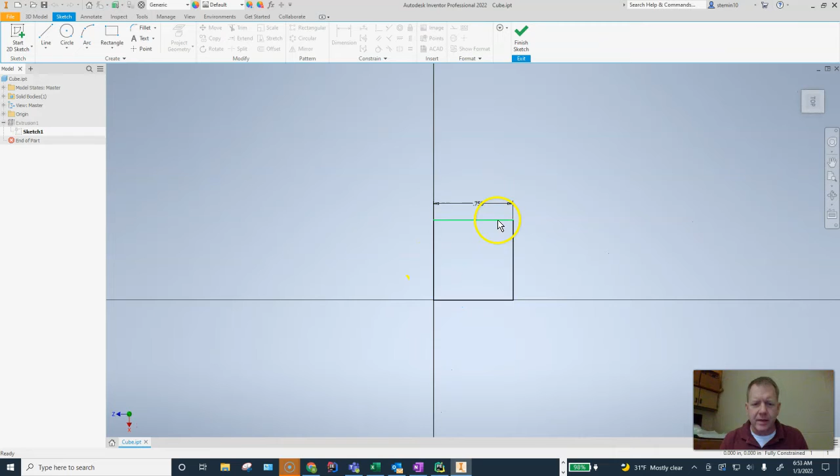So let's take a look at making a joint. I've created a new part file here in Inventor. It's a 3/4 inch cube. I can expand the extrusion I used to make the cube, right click and edit the sketch, and I can see that I made a square. Let's show some constraints.

I put an equal constraint. The equal constraint already came in because I used a rectangle for the opposite sides, but for the adjacent sides I created an equal constraint. So just one dimensional constraint gives me a fully constrained sketch, as I see down here with fully constrained. Awesome, we love geometric constraints.

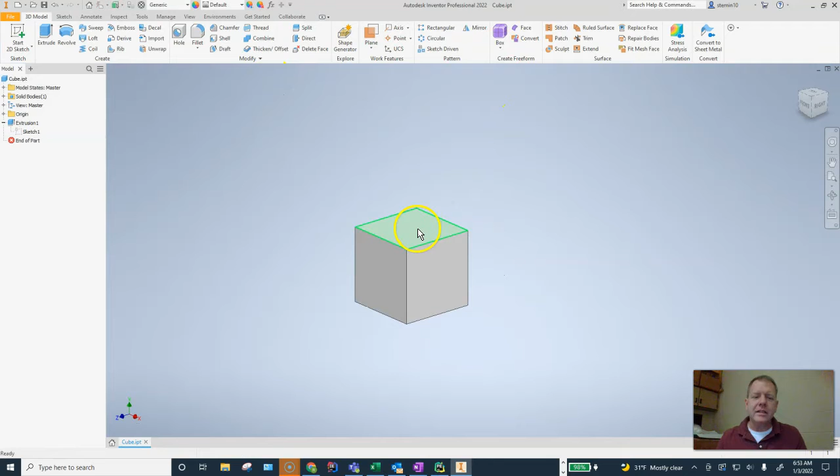However, this is a single cube. I want to put several cubes together. In fact, I want to put 3 cubes together, and I'm going to do that like this. I'm going to go up to the File tab here in Inventor, hover over New, and choose a new assembly.

I have saved this part file. The part file must be saved to be able to make an assembly using the part. So I come up here to Assembly. It's a new type of file, no longer an IPT file. It is a file I'll save as an IAM file - Inventor Assembly file, no idea why, but IAM is the extension. That's how you'll differentiate between a part file and an assembly file.

I am going to save it as cubes.iam. Now the first thing we have to do is bring in the parts that we want to create an assembly of.

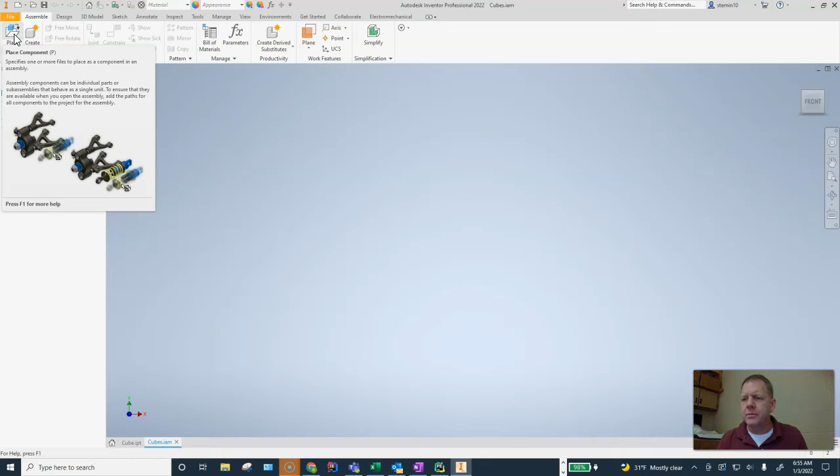So I'm going to come up here to Place, and if we hover over that, it tells us to specify one or more files to place as a component in an assembly. I can actually bring another assembly into this assembly, but that's pretty complicated, so let's stick with parts at this point. I am going to place a component. It brings up a file browser for me to look for my parts. I want to use my cube.ipt part. I'm going to click Open.

And it's going to allow me to now start placing parts. I'm going to zoom out a little bit and place a cube by left clicking. That's my first one, second one, third one, and what the heck, let's put in a fourth. Let's get a little crazy today. So I have 4 cubes in my assembly now.

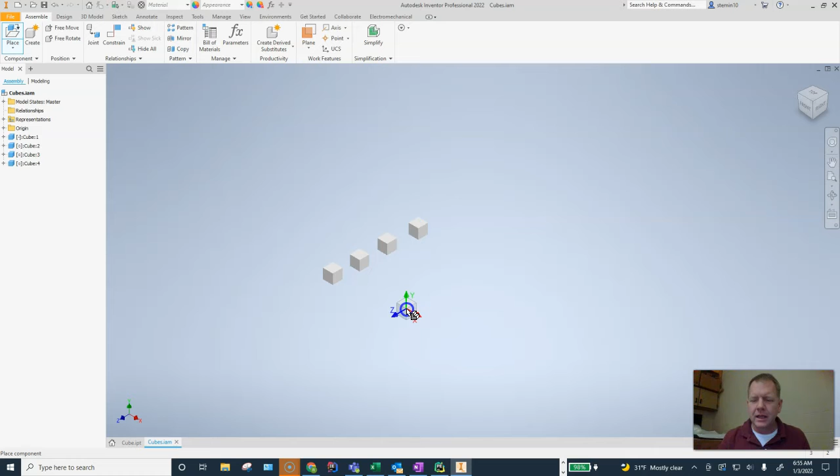The first thing I need to do is pick one of these cubes to be the anchor, because right now I am left clicking and dragging and I can move all of these cubes. None of them have any kind of fixed position in space. Well, I need one of them to become my grounded or anchor part. So I'm going to right click on this guy here, and I am going to choose grounded from the context menu that pops up.

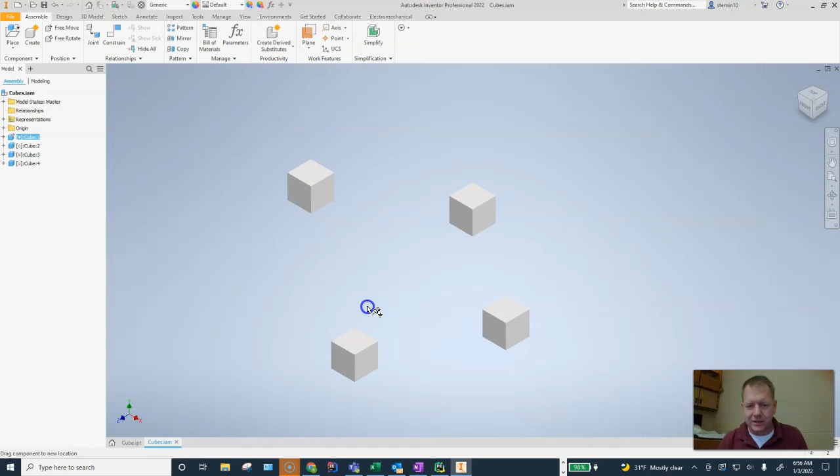When I hover over that, you can see my little mouse icon is different than this one. It has a little grounded icon symbol that shows up. And if I left click and drag, it doesn't go anywhere. It's now grounded. That's my anchor. And that's what we want. We always want one part to be our anchor.

The other parts now will come and join with that anchor. And because they become joined to the anchor, if we make rigid joints, meaning they can't move at all, they'll all be grounded essentially because they're glued to a fixed part to start. So that's the point of grounding a part. We'll unground it later and I'll show you exactly what that means.

But let's come up here now and create a joint. You can hover over the joint tool and it'll pop up and show you a little bit of help. A joint fully defines the range of motion, placement, and behavior of a component. These relationships that we're going to apply will tell the part where to go relative to another part. So these are all going to kind of be like a whisper down the lane of joints.

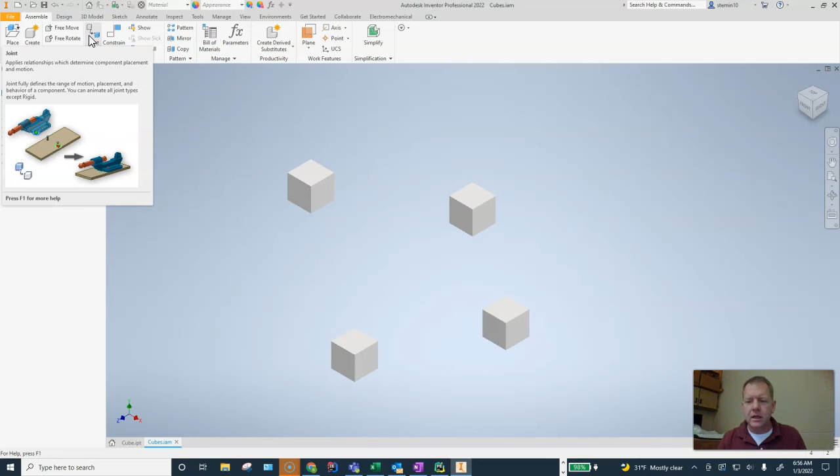The first part's grounded, the rest all come together to join that. So let's make a joint. Click on the joint tool, it comes up. I generally allow automatic to be the joint type that it creates to start. A gap would allow us to set an offset so that if we want them to be joined and locked in place but not stuck right next to each other, we can do that. And then our connections and alignments over here will define exactly how the joint plays out.

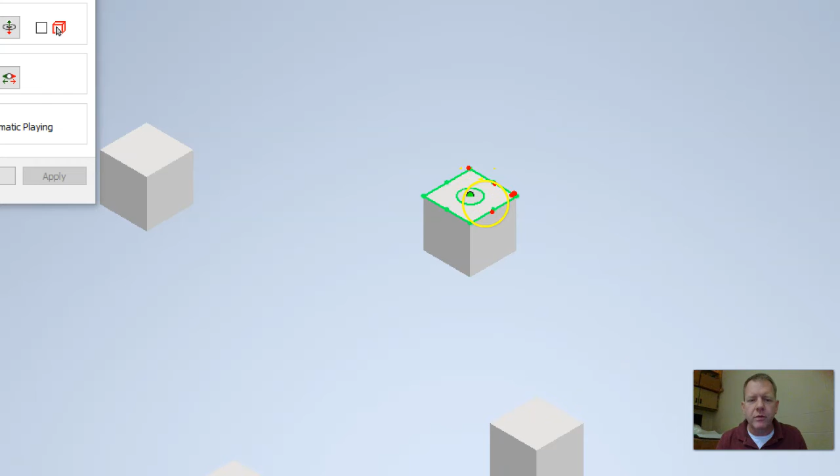So the first thing I'm going to do is pick. Down here it says place origin on first component. Well, the first component origin is what's going to move. So this is the part that's moving to join to the second part. I'm going to pick on this face, and you can see all these little green dots tell us the reference points that we're allowed to use for our alignment.

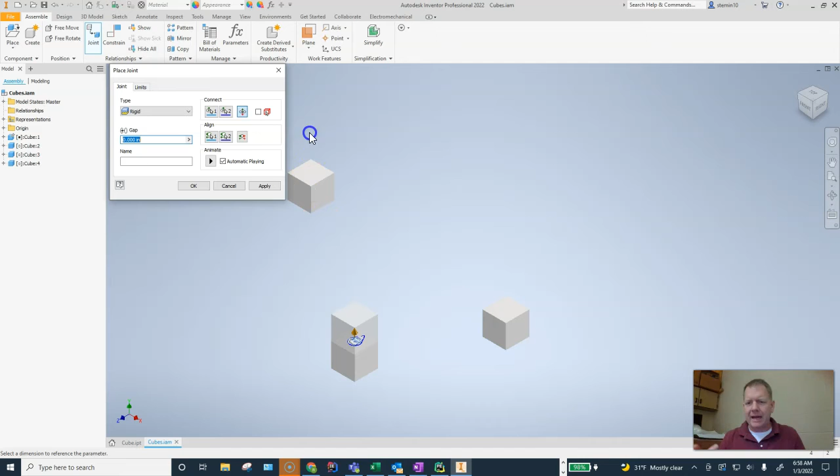I am going to use the center of this face. That's my origin. Then I'm going to join that to the center of this face. And you see a rigid connection is formed, and the two parts glue together, with those points of reference being the alignment points. If I'm happy with it, click OK, and I'm good.

The next thing I'm going to do is use an edge to show you how that works. And what I want is a cube to come off of the top cube here, off to the right a little bit, so it'll be parallel to the x-axis offset. The way I'm going to do that now is come up to joint, and I'm going to choose. Now I'm going to orbit around, because it's always the part that's moving.

I want this face, and watch what happens. When I pick a face edge, I can pick the plane that I want the mate to be, the joint to occur from, to be parallel, or I can actually pick it to be parallel to the axis. So I can either be parallel to the face or parallel to the axis. Parallel to the axis is good for rotational joints.

This, though, because I'm going to glue two faces together, I am going to use parallel to the face, but it's this edge I'm going to use. And you got to be careful about that little circle that gives you a preview. It'll tell you which plane you're going to use. So I want that to come down now to this edge over here. And you'll see that right now, the two faces are pointing opposite directions.

Well, I can also make it so that the faces point in parallel directions. Actually, the cube became consumed by the other. I can also flip it. So now this is a better view, I think. You can see that the edge point was used for alignment, but now my two faces point the same way.

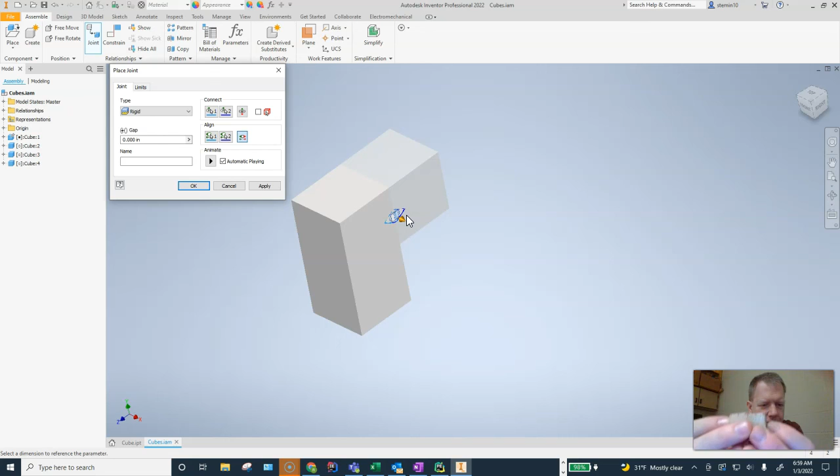We call that a flush connection. This would be a mate where the two faces go together. This would be a flush where the two faces both are sharing the same plane. So I want them to be a mate, but I also want them to rotate so that they're joined. Click OK and apply. So now I have three cubes together.

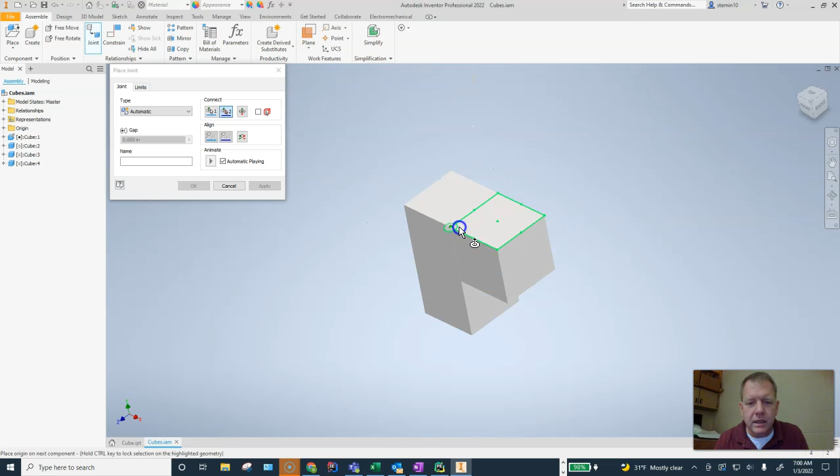One last cube. Let's take this guy up here and we're going to use a corner. The corner I'm going to use is going to be this corner with a plane parallel to this face, and it's going to go to this corner over here with a plane parallel to that face. I need to change my rotation.

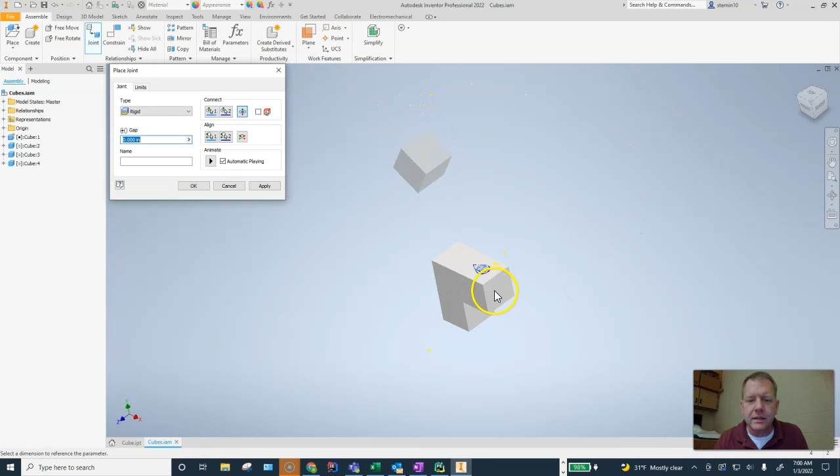And you see sometimes that the joints don't behave exactly as we want. So the better approach to this one would probably be joint. Let's go center of face to center of face, and we're good to go. A rigid joint. So there you go, an introduction to joints in Autodesk Inventor.